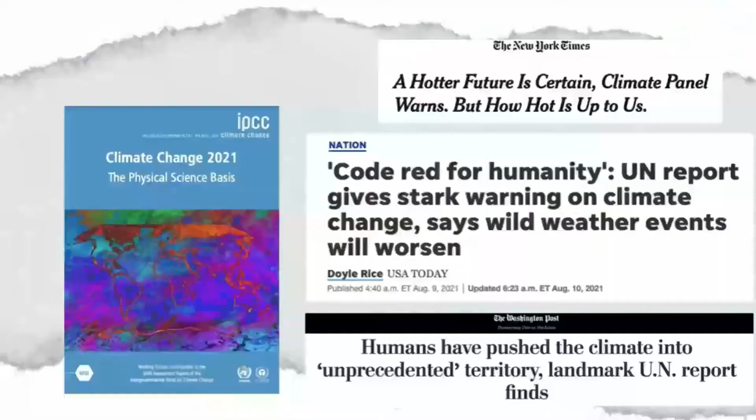There we go. All right, sorry, I'm getting the hang of the clicker here.

I'm honored to welcome you all to this event: 65% by 2030, 0 by 2040. Top 200 global firms and organizations lead with 1.5 degrees Celsius climate action. For those of you watching online, you can join the conversation using the hashtag COP26 Communiqué.

This event has been organized by Architecture 2030 in partnership with ASHRAE, represented here today by Ginger Scoggins, at my left here. Joining me here at COP26 are also Peter Exley with the American Institute of Architects, Alan Vallance with the Royal Institute of British Architects, Caroline Pidcock with the Australian Institute of Architects—which around the American Institute of Architects is known as the other AIA, I'm sure that works both ways—and Kotchakorn Voraakhom with the International Federation of Landscape Architects.

Today we'll be hearing from these leading professional associations representing the architectural, design, and engineering community about the actions their organizations are taking to reduce carbon emissions from the built environment to cap global warming at 1.5 degrees Celsius.

If we move forward together, we can keep 1.5 degrees C alive. But there's an old saying in the US: if you don't know where you're going, you'll end up someplace else. And we don't want to end up someplace else. So how do we meet the 1.5?

Well, the IPCC put out its 2021 report, and this is the carbon budget for 1.5 degrees C for keeping global average temperature at that rise above pre-industrial levels. We can see that to have a good probability of meeting the 1.5, our carbon budget is from 300 to 400 gigatons of CO2. That's how much we can put into the atmosphere.

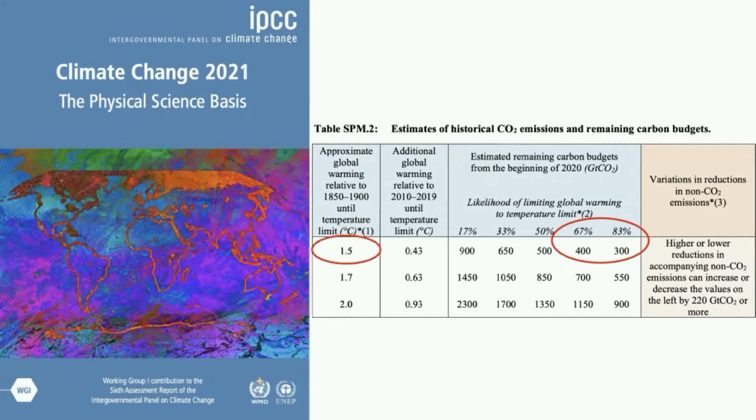So what does that mean? Well, we're now putting in about 40 gigatons of CO2 a year. This year we'll put in slightly less. But if we look at many of the pledges being made to phase out CO2 emissions by 2050, if we follow a straight line down, that's 600 gigatons. That's way over the 300 to 400 gigatons that's our carbon budget, our 1.5 degrees C carbon budget. So that doesn't work. That's too much.

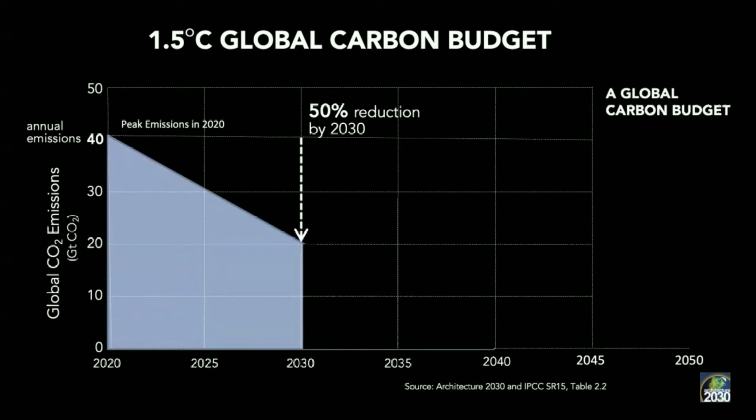So how do we meet the 1.5? Well, many scientists and countries and organizations are calling for a 50% reduction in CO2 emissions by the year 2030. If we follow that line down and meet that target, and keep doing what we've been doing, then we will phase out CO2 emissions by the year 2040, and that's 400 gigatons.

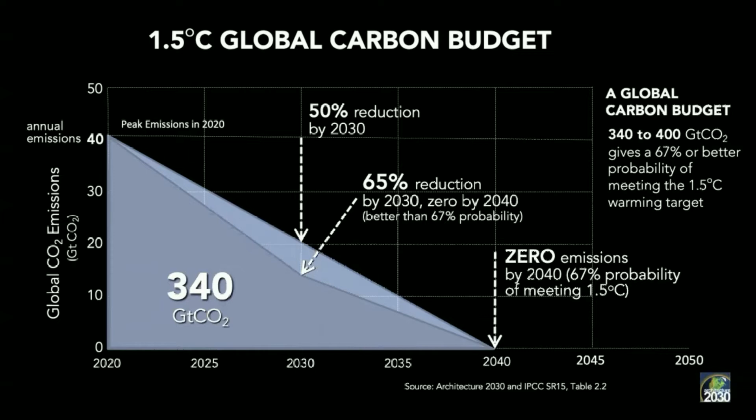That gives us a 67% chance of meeting the 1.5. And to have an even better chance, if we get to a 65% reduction in CO2 emissions by 2030 and then phase out by 2040, that'll be 340 gigatons, giving us over a 67% chance. So a 50 to 65% reduction between now and 2030 and a phase out by 2040 gives us a high probability of meeting the 1.5.

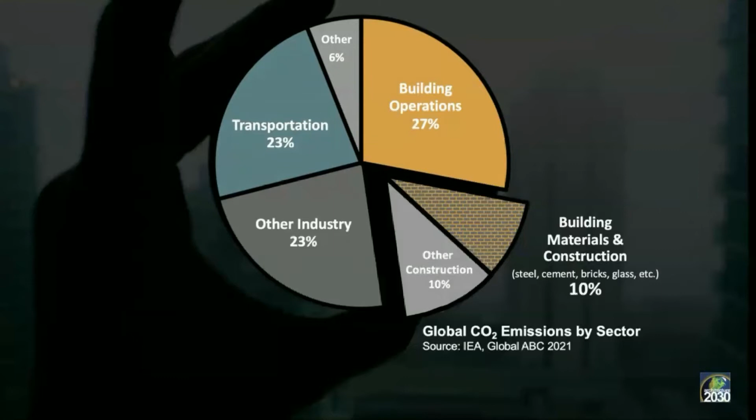However, this is a little misleading because building materials is responsible for 10% of all global emissions, and the infrastructure that goes along with buildings and other construction, such as roads, site work, and even interiors, that's under other construction, that's another 10%. So you can see that the built environment is responsible for close to half of all global emissions.

Well, the first modern building was the Bauhaus. That's considered the first modern building. Here you can see structure moves inside the building. We don't have bearing masonry walls anymore. We have columns, pinpoint loads, beams and slabs. So we can open up the floor plan and hang the exterior wall off the structure, so we can make it all glass. Then we can get light into spaces.

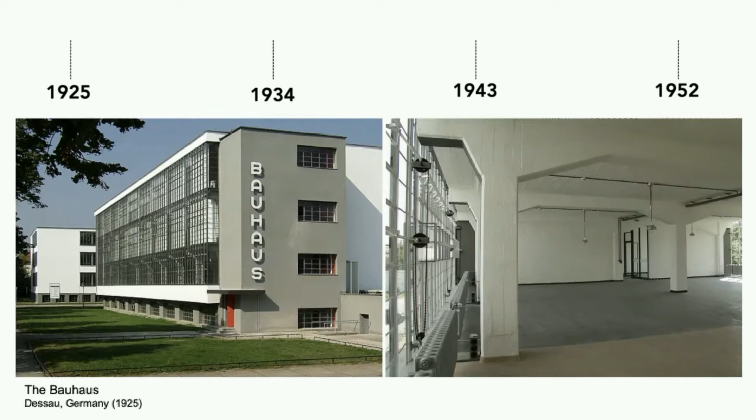So that was 1925. So what was going on in 1925? Things were pretty primitive. When the first modern building was done, there was the Model T truck. We didn't have television. We couldn't make transatlantic calls, for example. So things were pretty primitive.

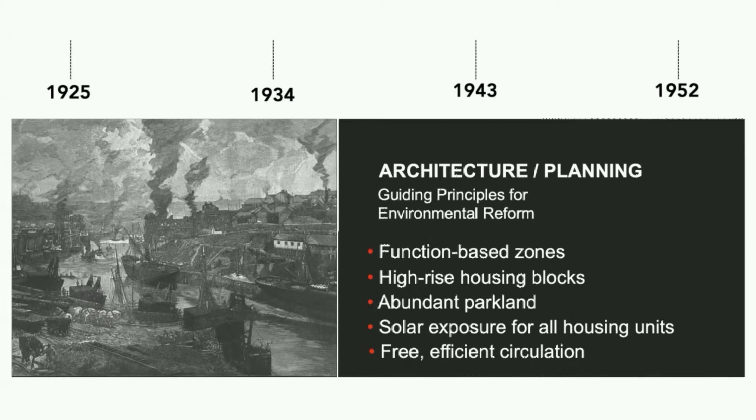And back then, with the Industrial Revolution starting in the early 1900s, conditions were really bad, and the architecture and planning community got together to address those conditions. People were dying of emphysema. Coal was being burned right in the middle of housing developments in cities. So they got together and said, this is untenable. And they set out kind of utopian environmental reform principles: function-based zones, get the housing out of the industrial areas, make them high-rise housing blocks, use all that glass to get solar exposure, open up the floor plan.

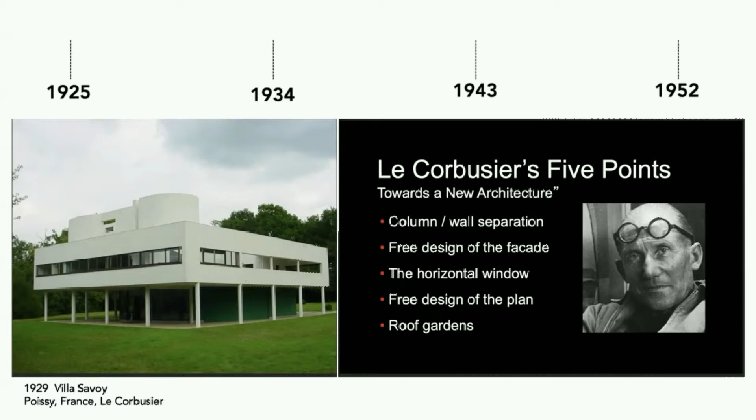Le Corbusier developed his 5 points toward this new architecture, which was a column wall separation. So you had columns, which could free up the facade design and use horizontal windows and lots of glass, and free up the plan. So this was the beginnings of the modern movement, and they laid out these principles.

That was in 1928. By 1932, those principles and modern architecture came to the US in a big exhibit at the Museum of Modern Art, and they called it the International Style. We could now take what was going on in Europe and bring it to the US and recreate it here.

By 1939, we had the Johnson Wax building. You can see a big open floor space with pinpoint columns, a beautiful space. And by '49, you had the Glass House by Philip Johnson as a statement. This was a single glass, all glass house in New Canaan, Connecticut, a very cold climate. Because fossil fuels were cheap, we could climate control any interior environment, and we were often running and developing high-rise, single glass, all glass buildings, because we could climate control them.

Energy was very, very inexpensive. By 1956, we had entire cities based on the modern planning of the modern movement.

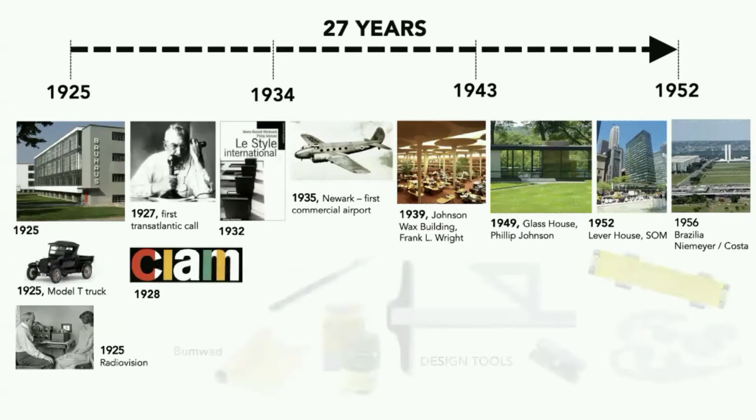So how long did it take to go from the Bauhaus, which was the first building in the Congress of Modern Architecture, all the way to the Lever House? From the Bauhaus to the Lever House took 27 years. That's it. We changed the world with those design principles and those designs with primitive tools.

The only thing we had back then was T-squares and triangles and pens that we had to dip in inkwell. It took years to do one set of construction documents, and we could only do really roughly rectangular buildings because we couldn't dimension a curve and get it built.

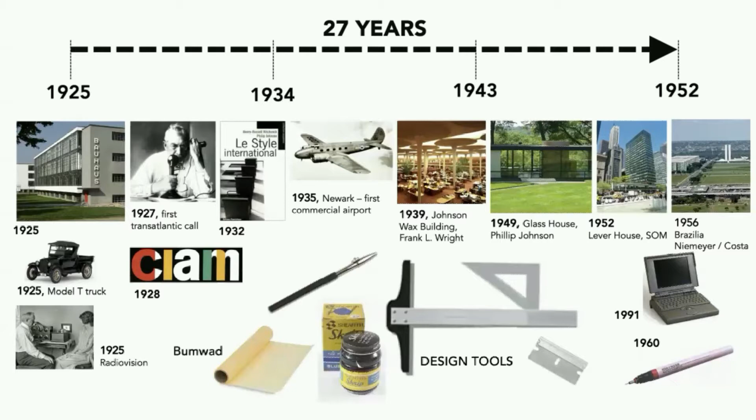We didn't get the first ink pen till 1960 and the first laptop computer till 1991. So we changed the world in 27 years with primitive, really primitive materials and tools at our disposal.

We now have 20 years - 10 years to get to that 50 to 65% reduction, and then another 10 years to phase out all carbon emissions by the year 2040.

Now, at COP, we've issued a communique, asking countries to pledge to get to a 50 to 65% reduction by 2030. If they do that, they'll be on track for zero CO2 emissions by the year 2040, and we can meet the 1.5 target.

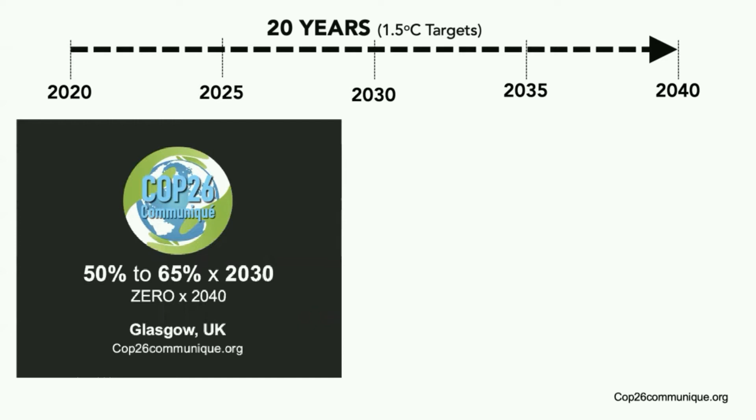The largest professional organizations in the world, representing over 1 million people, have signed on to this pledge and will work to meet the 50 to 65% reduction by 2030, zero by 2040, and are calling upon governments to do the same.

Also signed on to the communique are over 60 of the largest architecture, engineering, and planning and landscape architecture firms in the world, responsible for over $300 billion in annual construction, pledging to help countries get the built environment down to these targets. So what are the guiding principles we're setting out today for the built environment to make this change happen?

Well, for new buildings and renovations, we're calling for all new buildings to be designed zero carbon today. That means no on-site fossil fuels. We do that by designing efficient buildings, electrifying them, and using renewable energy for that electricity, either on-site mostly if we can, and then bringing it in off-site for whatever else we need.

And we're asking cities and jurisdictions to implement zero codes, because we have zero carbon codes today. If they implement them, then all new buildings will be zero carbon.

What about all the materials and construction to build all these new buildings between now and 2040? Well, we're calling for embodied carbon reductions in steel and concrete of 50% by 2025, then zeroing out carbon emissions in steel and concrete by the year 2030, and whole buildings zero by 2040, 50% by 2030.

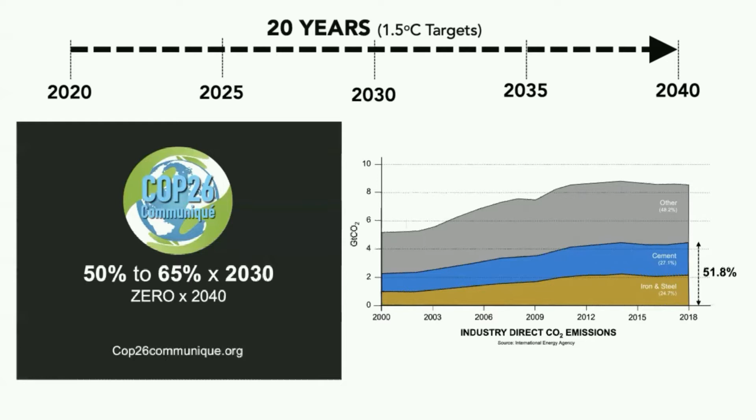Why single out steel and concrete? Because steel and concrete are responsible for half of almost all industrial sector emissions. That's everything that's made - just two materials are responsible for half. So if we start with those two materials, we can get very large reductions very, very quickly.

So what about all those existing buildings out there? Well, we know that a very small number of large buildings in cities all around the world - 5% or less than the total number of buildings in the city - are responsible for about half of a city's building sector emissions. The rest, the other 95% or more of buildings, are responsible for the other 50% of building sector emissions.

So we developed a two-part strategy for getting all buildings to zero. First, big buildings - mandate that they must get to zero carbon by 2030. It's not that difficult: they just get rid of on-site fossil fuels, electrify, and use on-site or off-site renewables to produce that electricity. We're asking local jurisdictions to pass policies, ordinances and mandates for that to happen with all big buildings.

There are just not that many of them, and it's easy to get them under control. Usually with the very big buildings, the people and companies who own them have the wherewithal to do it. And then for the small buildings, we give them out to 2040.

Again, electrify and use renewables, and do it at intervention points—at times when these small buildings are going to be renovated, at point of sale, or when equipment gets old and has to be replaced. Then we electrify and use renewables, and we're asking for policies and incentives for building owners to do that.

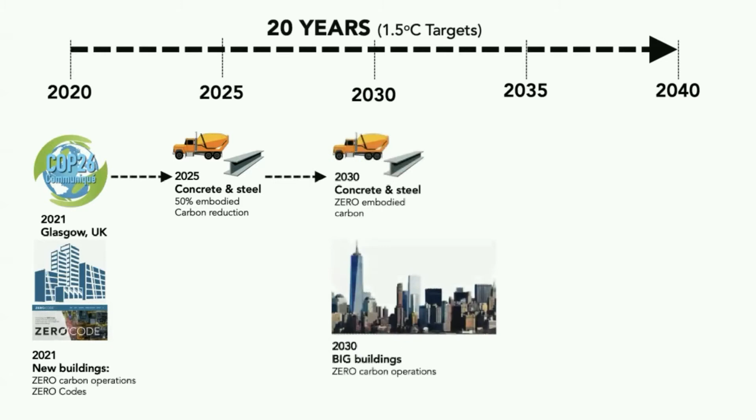We're issuing the communique today at the COP in Glasgow, calling for all new buildings to be zero carbon immediately. Then we work toward reducing the embodied carbon of concrete and steel, so that by 2025 we get a 50% embodied carbon reduction in concrete and steel. And then by 2030, we phase out embodied carbon in concrete and steel.

So it'd be essentially clean materials. And we have alternatives that we can use now if concrete and steel don't meet these targets. We have mass timber, cross-laminated timber, glue-laminated timber. Bamboo is now starting to become a material, and there's all sorts of other materials that are very low carbon.

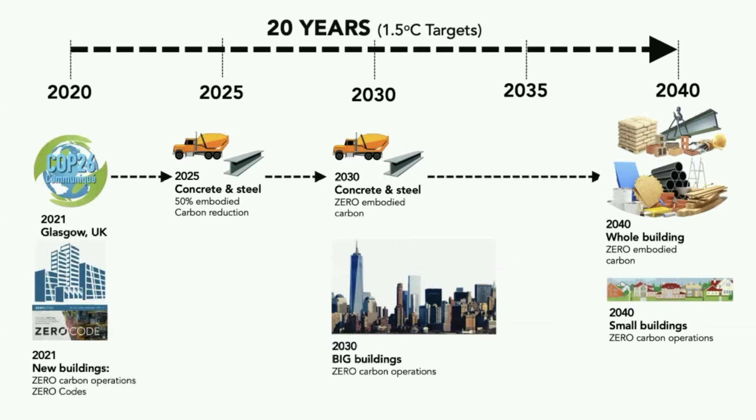We're also saying that by 2030, big buildings need to be zero carbon in building operations. And then out to 2040, all materials for all buildings need to be really zero carbon, and by that time we get the small buildings to zero carbon building operations too. That's how we transform the entire built environment between now and 2040.

And we're getting quite a bit of help. Solar is now the cheapest electricity in history, and that started last year. We have all the tools that we need to get this done very, very quickly. We can design buildings very quickly, get the drawings done, and get them built and renovated.

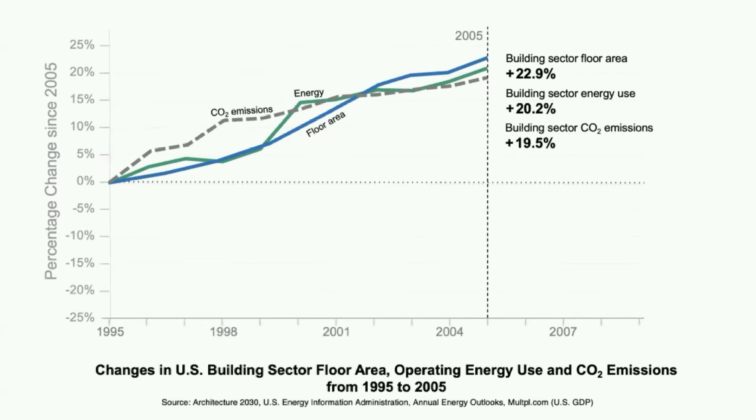So how are we doing? Let's take a look at the US. Traditionally, from the beginning of the Industrial Revolution, not even 1995, as floor area increased, so did energy consumption of the building sector, and so did CO2 emissions, because all fuels were essentially fossil fuels. So as you built more buildings, you had increases in energy consumption and CO2 emissions.

But something happened in 2005. From 2005 to 2020, floor area increased—we kept building, actually adding 53 billion square feet to our building stock in the United States. But look what happened to energy consumption: it flattened out and actually went down slightly. So it didn't keep up with floor area. We were building, but not using any more building operations energy, because buildings coming in were more efficient and we were renovating buildings down.

But look at the drop in CO2 emissions. As we kept building and renovating, we also kept using cleaner and cleaner fuels. In these last few years, we've been switching to mostly renewables. So now in the US, we have a 30% reduction in CO2 emissions across the entire building sector, even though we've added 53 billion square feet to our building stock.

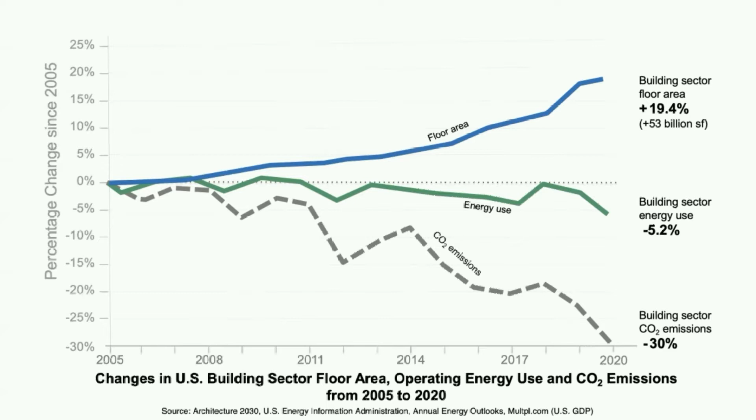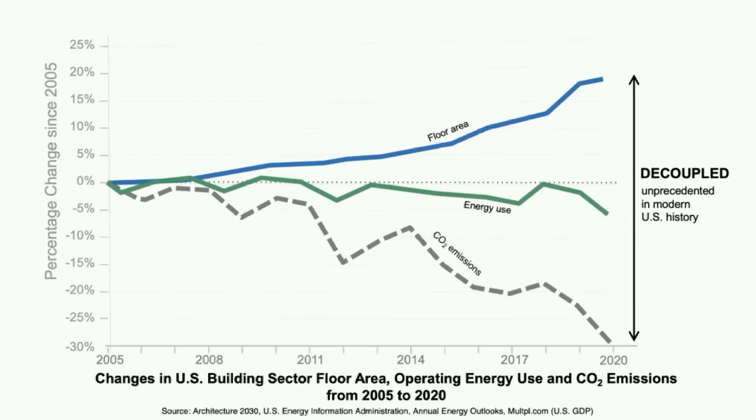This decoupling of growing building floor area and reducing emissions is unprecedented in US modern history, and it illustrates that it can be done, and it can be done quickly.

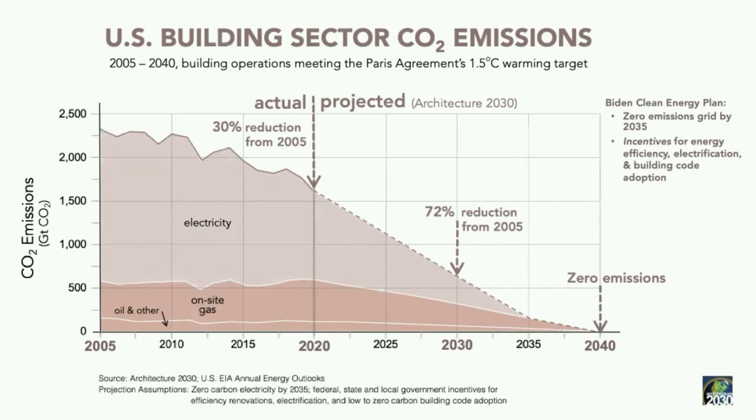So this is what we're projecting for the US. We're down 30% now from 2005 levels. Our administration wants to clean up the grid by 2035. If we do that and provide some incentives—which they've just done for energy efficiency and electrification—we expect the building sector in the US to reduce its building operations emissions by 72% from 2005 levels by the year 2030, and then get to zero emissions easily by the year 2040.

So how are we doing globally? Well, worldwide, since 2010, the last decade, we've added 22% to our building floor area—a huge amount of floor area worldwide. This is energy use: it has not gone up as fast, so we're beginning to see a decoupling of energy use.

In fact, in the last year, because of COVID, energy use has gone down slightly, about 1%. But we see a flattening out in 2018 and then this slight reduction. So we're beginning to see happen globally what happened in the US over the last 15 years. And here we see emissions—this is very promising. We can see this decoupling of emissions and floor area taking place, and in the last year it's happened because we switched almost exclusively to renewables.

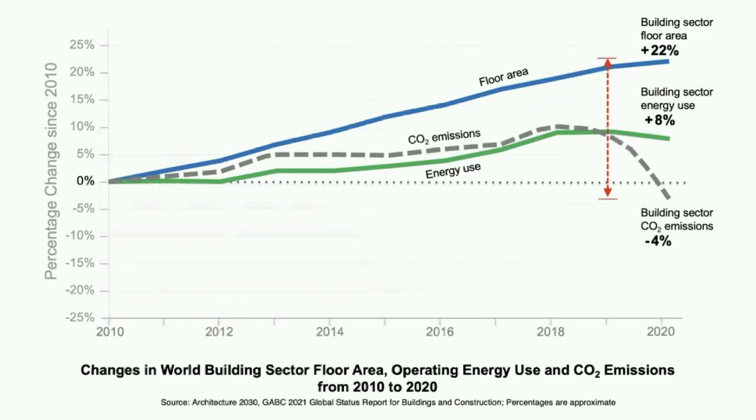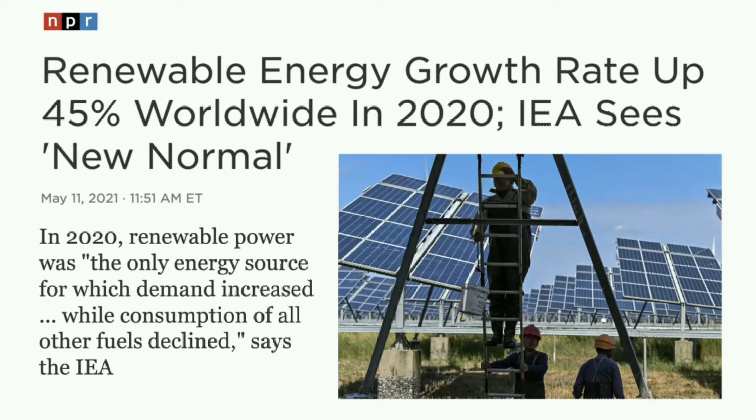And this just out in 2020, this past year, where we see that major drop, renewable power was the only energy source for which demand increased while consumption of all other fuels declined. And that's responsible for this huge decline in emissions in the global building sector over this past year during COVID. We've got to keep that up.

We've issued the COP26 Communiqué. We're calling for a 50 to 65% reduction by 2030. That puts us on track for zero by 2040. We're ready, and we are already walking the talk, so they say. And if we move forward together, we can easily keep the 1.5 degrees C alive in our sector. Thank you so much.

Well, thank you so much, Ed. Once again, crystal clear and inspiring. Now let's hear from the panel that's here with me today in the room.

So just to repeat the introductions, I have here representatives of the leading professional associations from around the world who have signed on to the COP26 1.5 degrees Celsius communique, and they're going to share their insights into really why they decided to sign on to this challenge and the steps their organizations are taking to reduce emissions in the built environment. So as I mentioned before, the other panelists here with me today will hear in the following order.